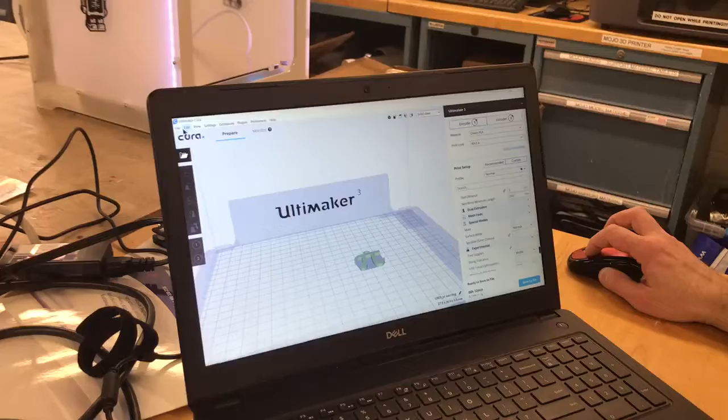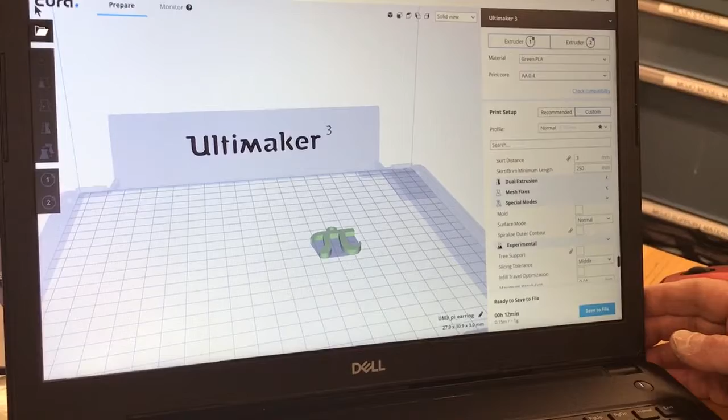Okay, so this is the latest version of Cura. The history is that Cura is the slicing software developed by Ultimaker, and every 4 to 5 to 6 weeks there's a new version. 3.2.1 is what we're on right now, and any day now we'll see a beta release of the newest version, and within a couple of weeks the beta version will go to general availability.

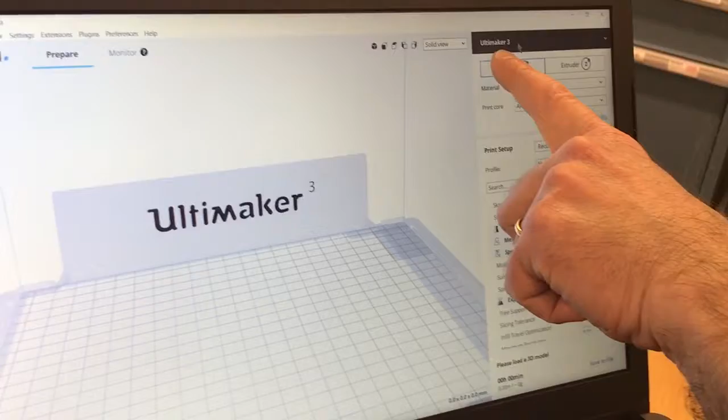So I'm going to click on Edit and clear the build plate, and the part will disappear. So in Cura, here are my settings and things I have control over on the right hand side. Up at the top I have Ultimaker 3. Cura works for many different printers, including all models of Ultimakers, so you can choose your model and change it with the drop down menu. We're going to stay on Ultimaker 3.

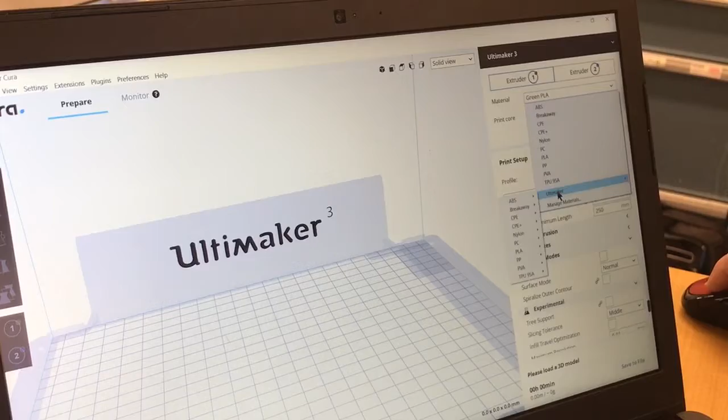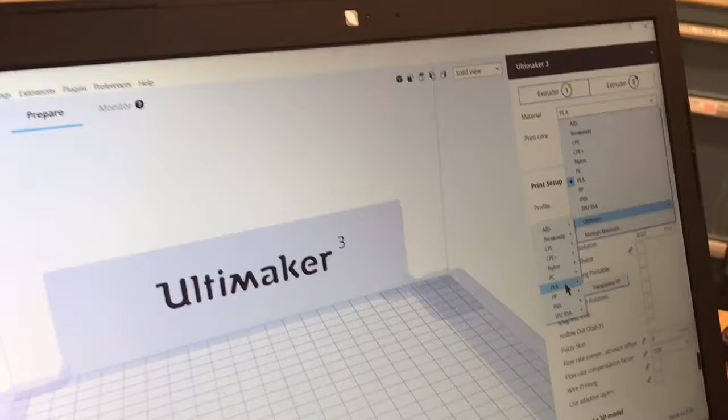We have 2 extruders. In extruder 1 we've said green PLA, but let's put that back to what we actually have. So I can say PLA and it will go to, I'm going to discard my changes, generic PLA. But I can also go down, click on Ultimaker, then PLA, and then it will give me all the colors of Ultimaker PLA available.

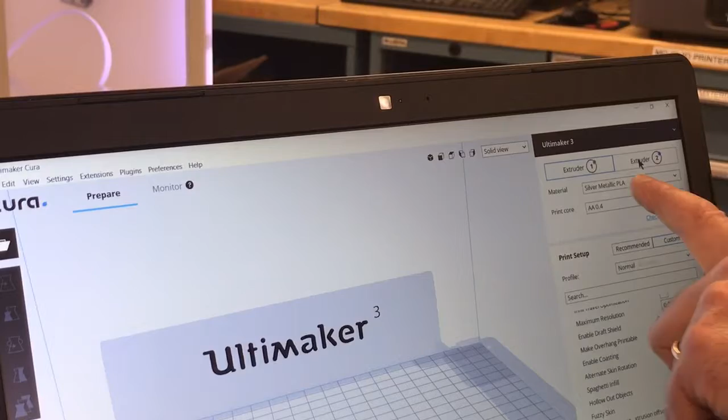So I can be very specific and say, for this model, I'm printing in silver PLA, and that will load. So now we have silver metallic PLA. We're printing with the AA print core, and if I click on extruder number 2, it'll switch over. The material is PVA, the water dissolvable support, and it's printing with the BB print core. So now my extruder settings are good.

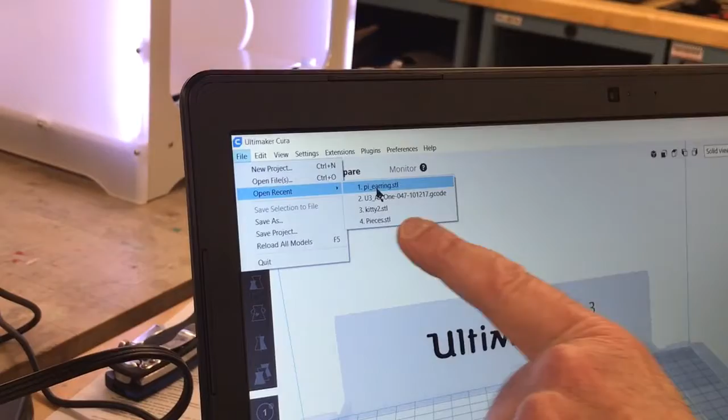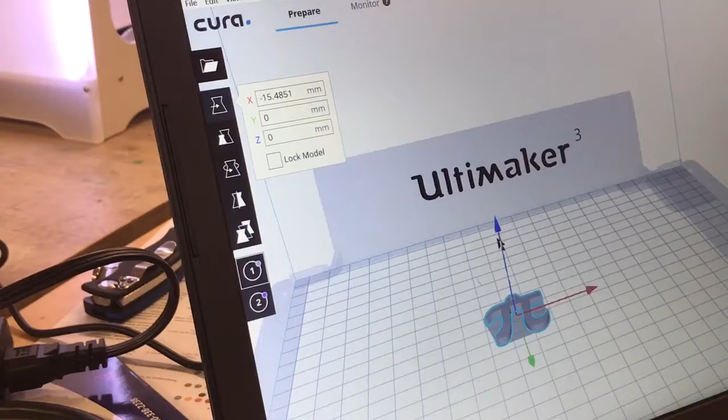I'm going to bring in a part. File, open recent. I'm going to bring in this pi earring. It loads the file. When it's not clicked, icons are grayed out. Click on the part. Icon number 1 is move. So I want to slide it back and forth. If it's something I wanted to raise up and down, this is automatically going to put it back on the bed. Grab the front arrow and I can move it.

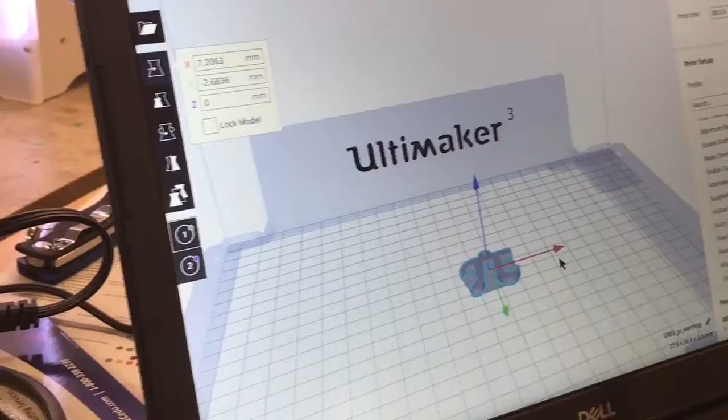What's happening is every time I complete a move, Cura slices it automatically. So every time I make a change to my model, within a few seconds it's sliced and ready to be saved. That means it will be converted to a G-code file, which means it's prepared and can be loaded into the printer.

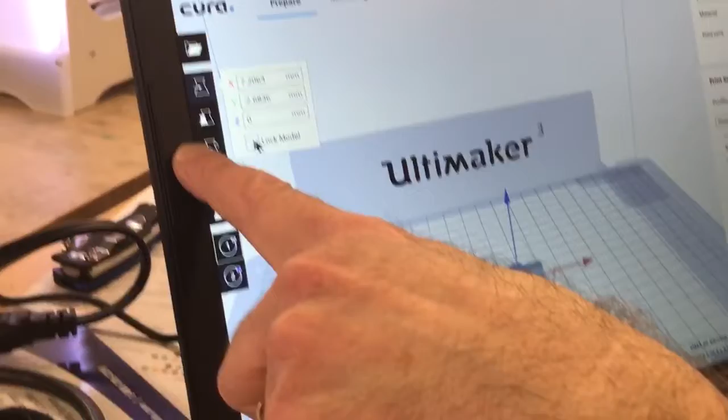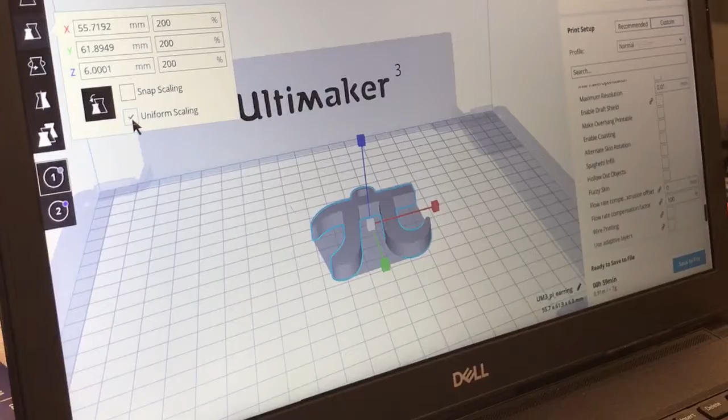Back on the left hand side, the second icon is scale. So if I choose uniform scaling and make a change, this is at 100%, if I put in 200% and enter, now I have a 200% pi earring, automatically sliced and ready to go. I can unclick uniform scaling, and then I can stretch this any way that I want. Third icon is rotate.

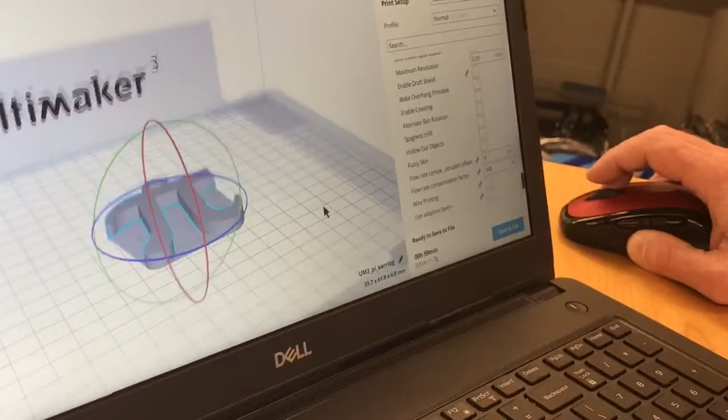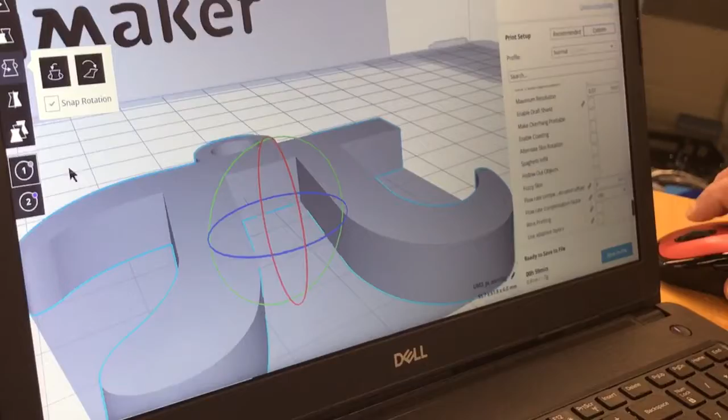I'm going to click on the part and click my right mouse button, and I can turn the build plate around to get a view of these rotate rings. With my mouse scroll dial, I can zoom in, and a great feature they added to Cura is that now that it's out of view and very big, I press the shift key and the left mouse button, and I can pan. So I can bring my earring into view.

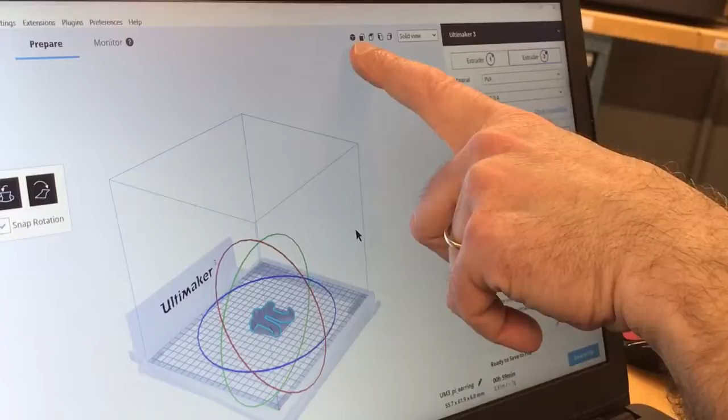And let me add, up top, I have view icons. So very quick, front view, top view, side view. Again, back to the isometric view. So if I get lost moving things around, I can always click on this and get back to normal. Right click means I can rotate this. Shift key and left click, I can bring it up to where I can see it.

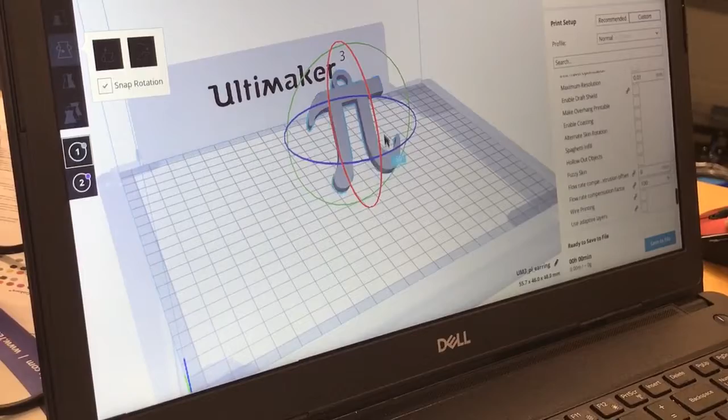So now the part is highlighted and the rotate rings are shown, so if I wanted, I could raise this up. That seems like a crazy way to try to print it, but I also might want to just twirl it around. So that's what the rotate icon is for. And then there's one more.

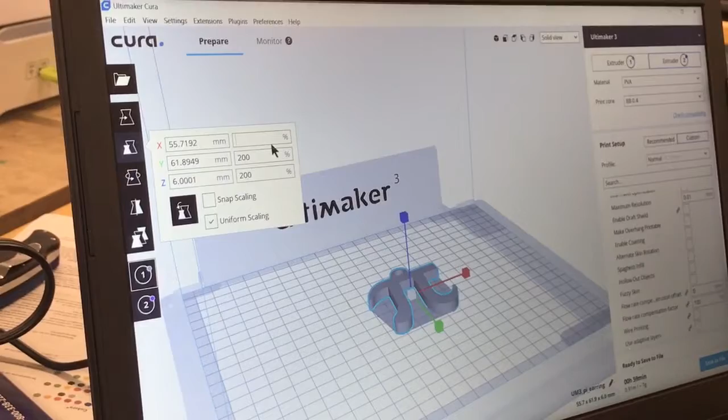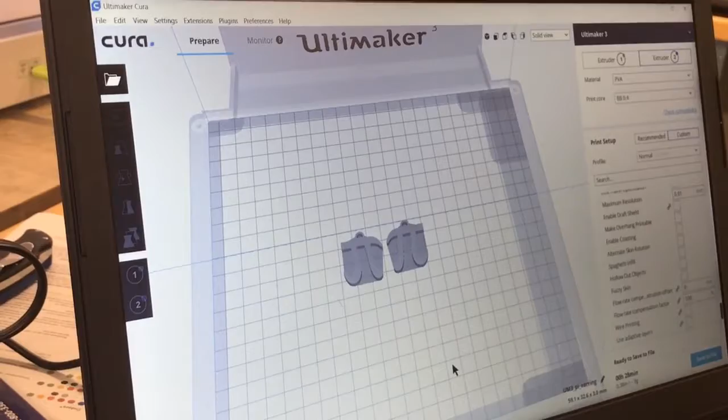So this is one of a pair of earrings. We're going to go back to scale, make this 100% again, then go to file and bring in another pi earring. So I have 2 earrings. Now I'm going to click on this part and go to my 4th icon, and I'm going to change this. So now I have a pair of earrings. Again, I highlighted the part, I clicked on the mirror function, and that's how I can do a flip.

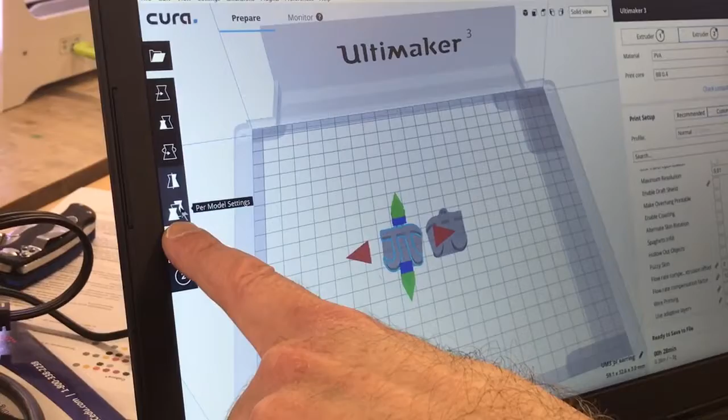The last item here is for custom settings only. Say I was doing an experiment and wanted to print 2 earrings with entirely different settings, I would use this per model settings icon, so I could choose independent settings for each earring, but only when custom is clicked. Recommended are the standard settings. If recommended is clicked, per model setting is grayed out. So very simple to use. When you get started, you'll probably be using these recommended settings.

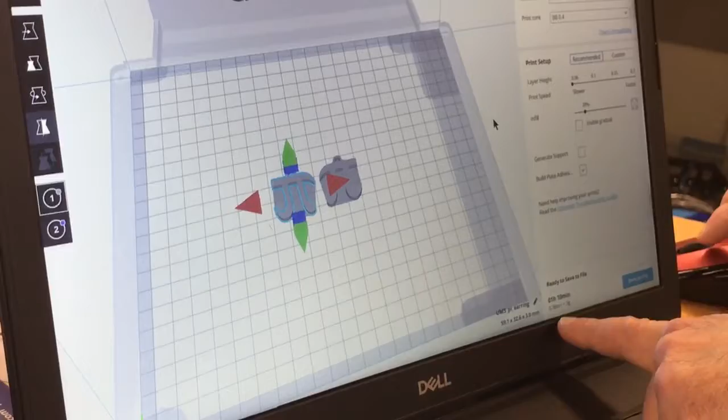So here's how I change the layer height. 0.06 is the finest. It dramatically increases the print time. So to print these little earrings, 1 hour and 10 minutes at 0.06 with 20% infill. But as a rule of thumb, the smaller the part, the higher the infill should be. So printing earrings, they should be practically solid. Otherwise, there just won't be much to print.

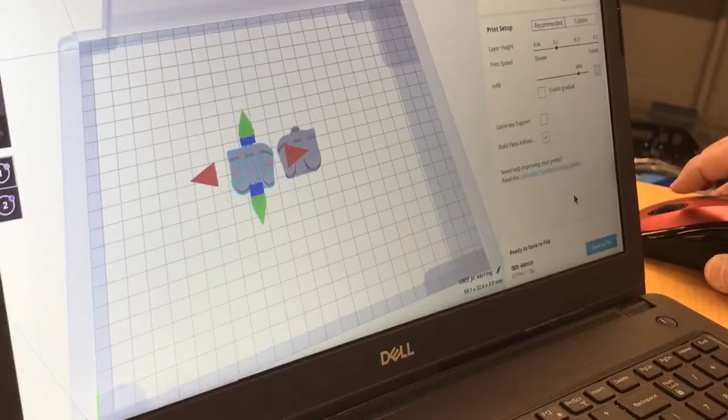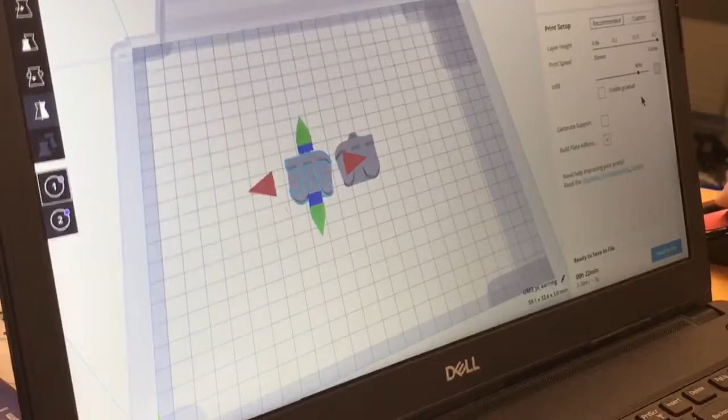If I printed these at 0.1 millimeter, the time drops from 1 hour to 44 minutes. If I print them at 0.15, which is still an excellent print, the time drops to 28 minutes. And if I print them as an average print at 0.2 millimeters, the earrings drop down to 22 minutes at 80% infill. So that's a crash course of using Cura.

Now, here, you have 2 options. If I had a flash drive, it would say save to removable drive. If you choose save to file, you get a browser window and you can choose any folder on the removable drive. If you just hit removable drive, it'll put it on the root directory of the flash drive. Make sense? So we'll cancel that.

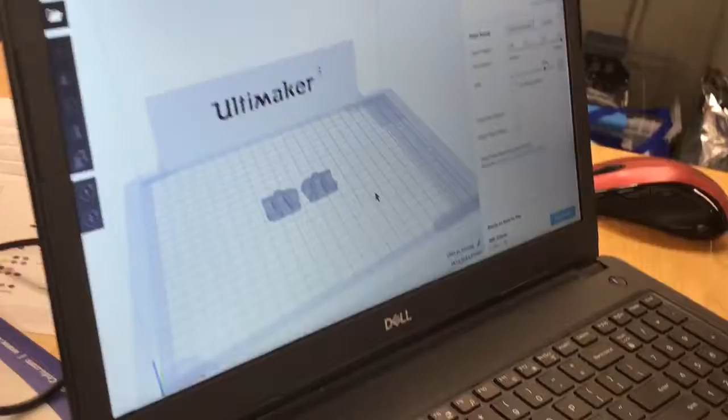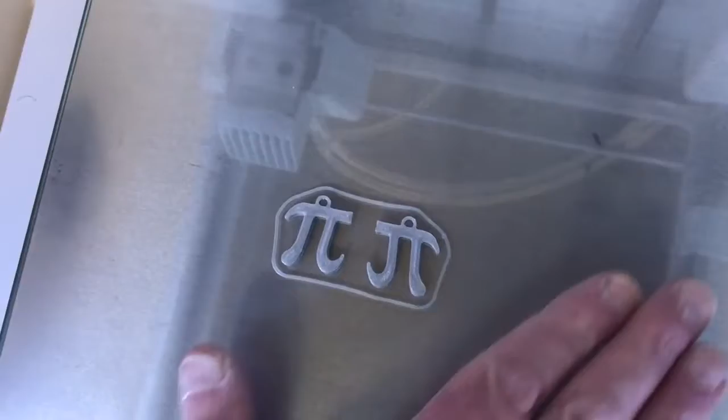We'll leave this alone. Our earrings are finished, so we're going to scoot back over. So our earrings are done, and if we let this heated bed cool down for just a moment, we should be able to just twist those earrings right off. Again, we didn't use any glue to print PLA. We'll let them cool just for a moment, but the prints are done.